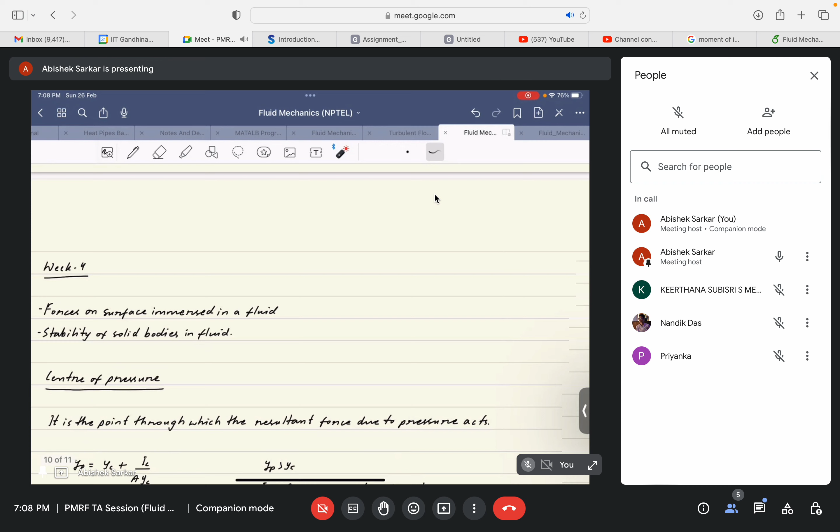So if a body, say a flat plate or any arbitrarily shaped body, is placed in a fluid, it will encounter some forces due to the pressure distribution along its surface. Since the pressure distribution is not uniform throughout the fluid, the center of pressure is not equivalent to the center of gravity of the body, right? So you can just refer to the following diagram.

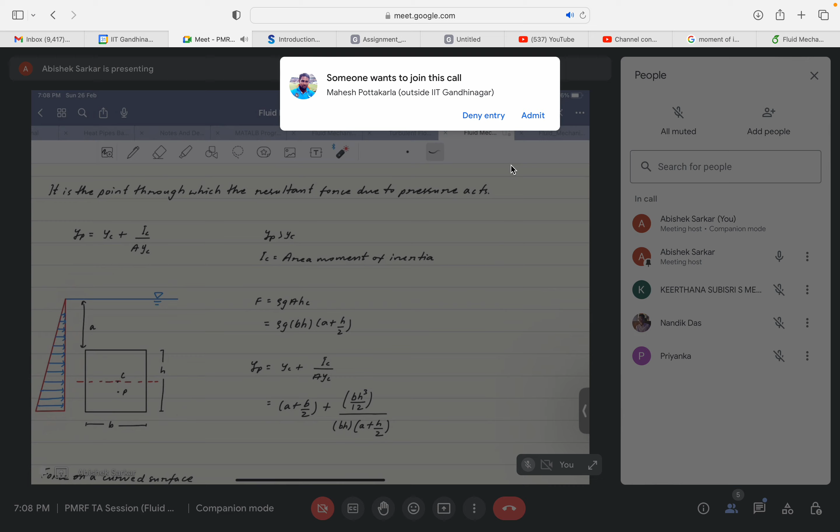So here you can clearly see that this force triangle basically represents the pressure distribution in the fluid, and this is not uniform. Why? Let me just wait. So why isn't it uniform? Could anyone please explain? Because of the height. Yeah, so thank you again.

If you remember the lectures of week 3 and the previous sessions, you can remember the equation dp/dz = -ρg, or if you just integrate it, you will find that it is -ρgz plus some constant, and you will eventually get to know that the constant is the initial pressure that we define on the surface.

So here you can clearly see that pressure is a function of z, and z basically means in this diagram the depth where the object is placed from the free surface. This triangle and these two lines represent the free surface, so it is the depth of the object from the free surface, and thus pressure varies with the depth. That's why there is this variation along the vertical height.

But say there was a scenario where the pressure distribution was uniform throughout the depth of the body. How do you feel about the position of the center of pressure now compared to the center of gravity of the object? Would it be the same, different, or if different, why so?

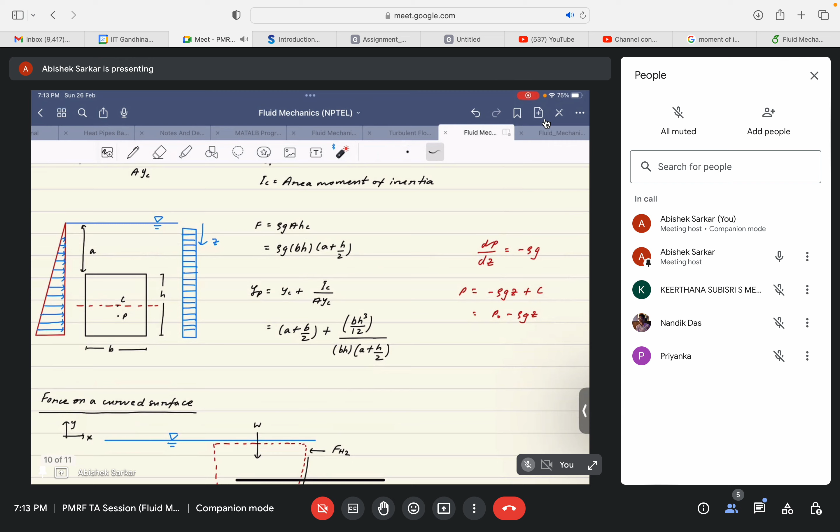So all these three quantities are bound to be positive, no matter how small the value of this fraction becomes, this quantity would be positive, and thus yp will always be at a greater depth compared to the center of gravity of the object. Okay, so I guess this is a very simple concept, but it's important for you to remember. So that's all. Okay, then we just recapitulate the forces on curved surfaces.

So I'll just explain a bit and then go through it as quick as possible. Imagine there is a curved surface placed in a fluid at a certain depth. So this is the curved surface. I've drawn it by this black line. And here you can clearly see the forces acting on this curved surface.

So there are various ways to evaluate it. I guess Professor Chakraborty also mentioned the integration: if you know the function of this curve, you can find out the forces by integration, by taking an elemental area. But from an engineering point of view, as engineers, we would like to take the simpler approach, the approach that is deemed to be much simpler and equivalently accurate. So here we take the concept of projections.

So here you can see that, if you recall it from the lectures, the horizontal force that acts on this curved surface is equal to the horizontal force that would act on the vertical projection of this curved surface. And as you can see here, if I just mark it, its vertical projection will be this area.

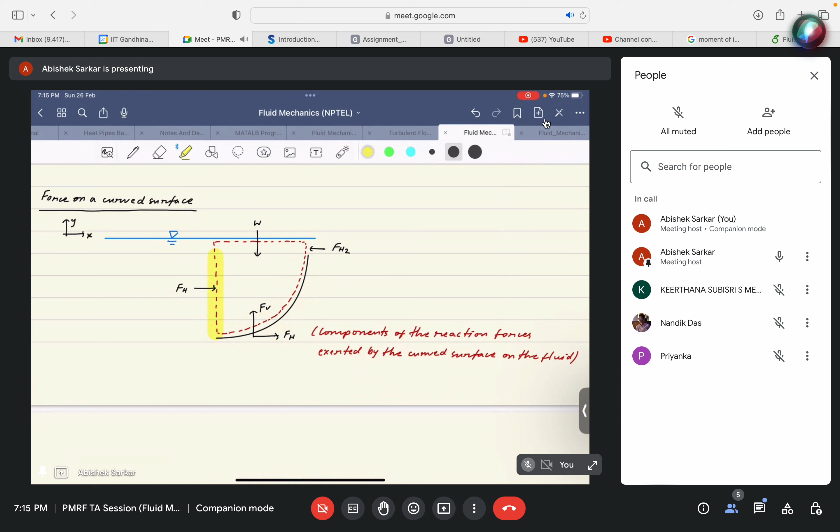And if you recall again, sorry, the horizontal force would be equal to the force that acts on the vertical projection of this curved surface area. And the net vertical force would be equal to the weight of the fluid, right? If I'm not wrong. So yeah, I guess again these are clear.

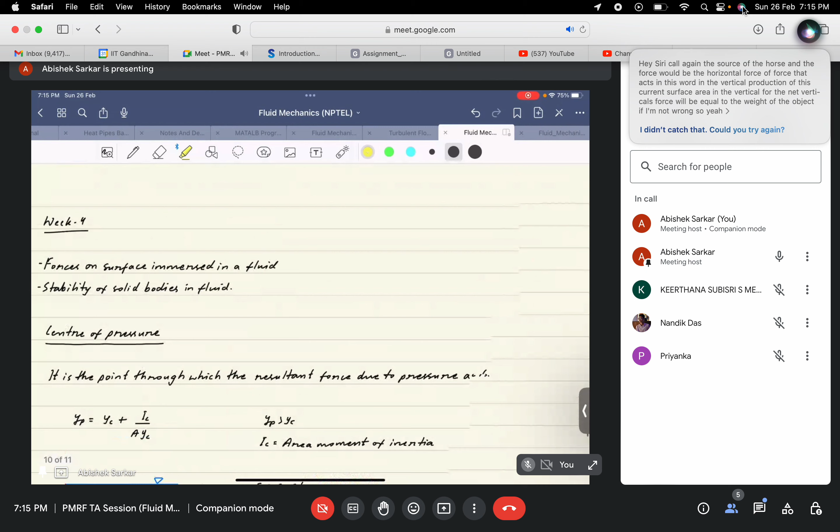So let's now directly go to... okay, so is there any doubt regarding these concepts, in this first concept at least, the forces acting on a surface immersed in a fluid? Is that clear? Nandik, Priyanka, Keerthana. Oh, yes, thank you, Nandik. Thank you again.

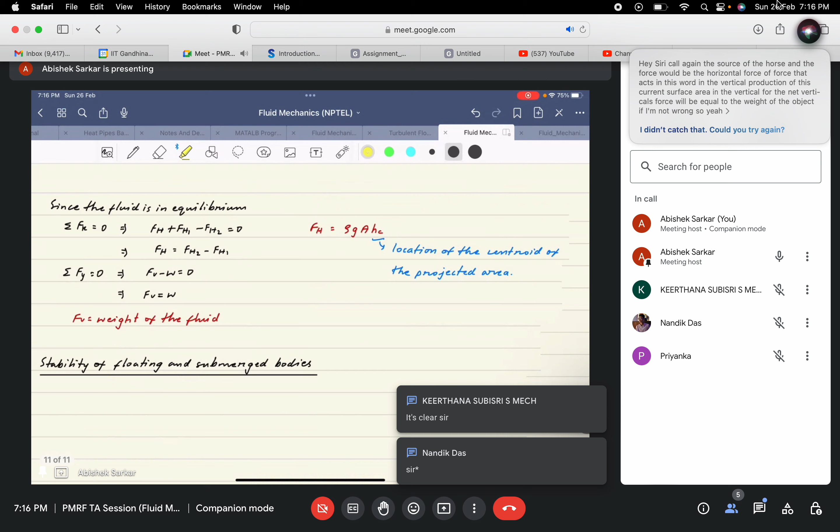Okay. So now we look into the stability of floating and submerged bodies. I just wanted to ask you the difference between floating and submerged bodies. Could any one of you please explain the difference between a floating and a submerged body?

Nandik, why don't you? Okay. Priyanka, yeah, you can go ahead, please. Yeah, sorry. Hello, sir. Or should I wait, sir? No, that's fine. You can go ahead. That only I told, no? You can go ahead, please.

Sir, in a submerged body, the object is entirely inside the water body. Whereas in floating, depending upon the object, some portion will be inside and some portion will be outside. Okay. Thank you again. Again, I'm curious to know what determines the height.

If you just think about it, you solved some problems, I guess. What determines the depth up to which the body is submerged in the case of floating bodies? What is the determining factor in those cases? If you could just recall.

Like, say there's a body A and there's a body B, and say body B is more submerged. Okay, Nandik, I can just complete the question. Body B is submerged to a greater depth compared to body A. So what insight do you get from this? What can you say about body A and body B if they're submerged in the same fluid?

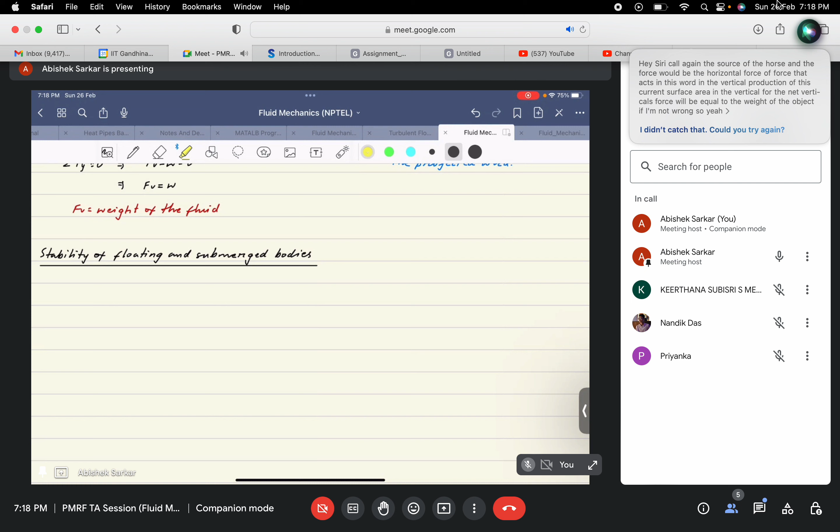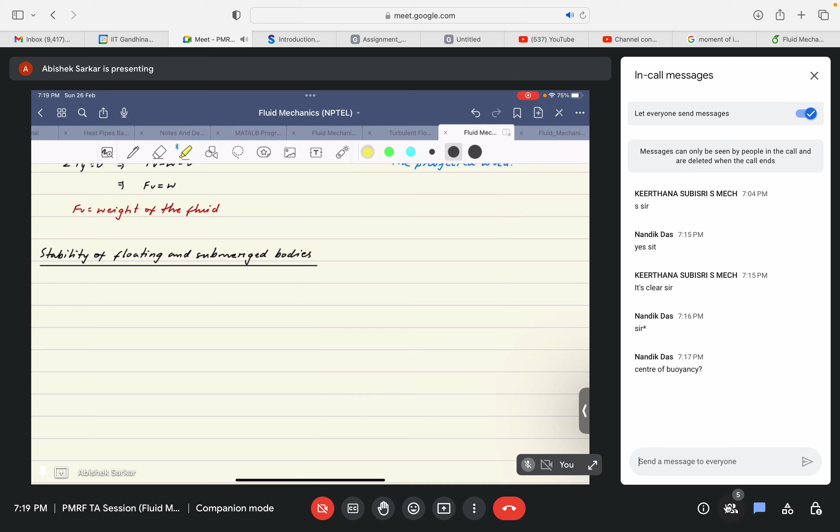Nandik, you mentioned, let me check again, the center of buoyancy. Do you have any doubt, or you wanted to say that this is what drives the depth of immersion in the case of floating bodies? I guess not directly. Center of buoyancy is actually dependent on the density of the body.

If the body is denser, it would get submerged within the fluid to a greater depth. Okay, and then the center of buoyancy would just be determined by the height of the submerged part divided by half. If it is a symmetrical body, as Priyanka correctly mentions, then it would just be half of the submerged part.

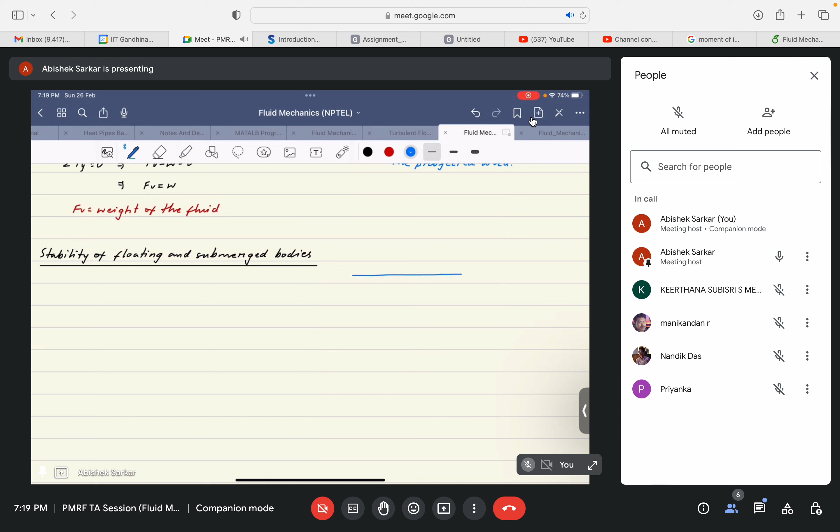I will just make it clear because maybe I am not able to explain it in a better way. Say this is a free surface of the liquid, and the body is submerged to this depth. This is the depth of immersion within the fluid. Then, as a conventional approach, the center of buoyancy is just given by h by 2, if I'm not wrong, right?

The center of gravity would obviously be, if the height of the body is h, then, sorry again, the center of gravity would be at h by 2, and the center of buoyancy is half of the submerged part. Yeah, it will be here. So this is the center of gravity, and this is CB. So is that clear, Nandik?

Okay, thank you. Since all of you have nicely clarified my doubt regarding floating and submerged bodies, let us first discuss completely submerged bodies, stability for completely submerged bodies.

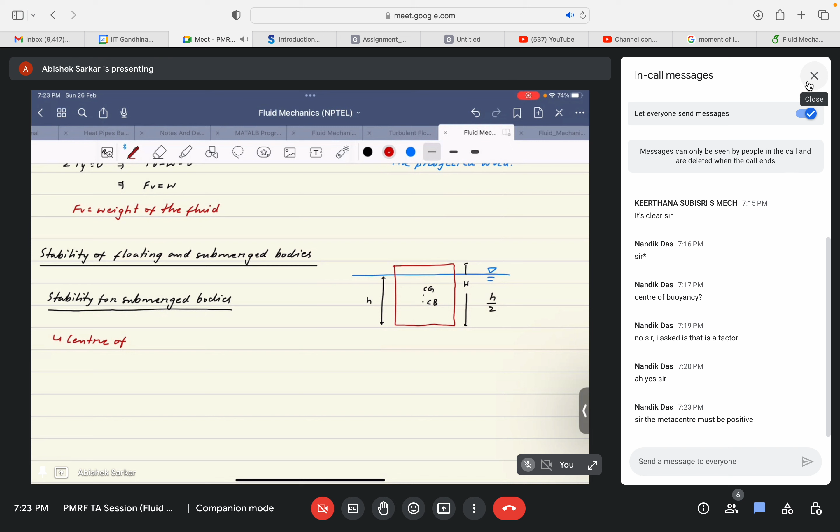Okay, you have written something. Let me see. Okay, metacenter. I guess you misinterpreted my question. You are relating the concept to some other case that I am going to discuss, but I am discussing submerged bodies. Submerged body basically means a body that is completely submerged within the fluid. So in that case, I don't think metacenter comes into the picture, but I guess you got it now.

Okay, so yeah, Priyanka, as she mentioned, she's absolutely correct. It is the center of buoyancy and the center of gravity that determines the stability of completely submerged bodies. Okay, so I would just like to draw one picture, and I would not repeat everything that has been discussed by Professor Chakraborty. I will just draw one picture and ask you about the locations of these points and how the locations of these points determine the stability. Okay, that would be better and I guess more efficient.

So I guess this was the exact diagram Professor Chakraborty has used. So okay, again see, it is completely submerged, so there is no point of meta center here. Say this is the center of buoyancy. Now I will use different colors so it is more clear. So this is the center of buoyancy. Say I give it the notation B, and this is the center of gravity. Again, sorry, this should be what? Wait, this is center of gravity. Okay, so I think I drew it correctly. So say I want two cases right now: stable and unstable.

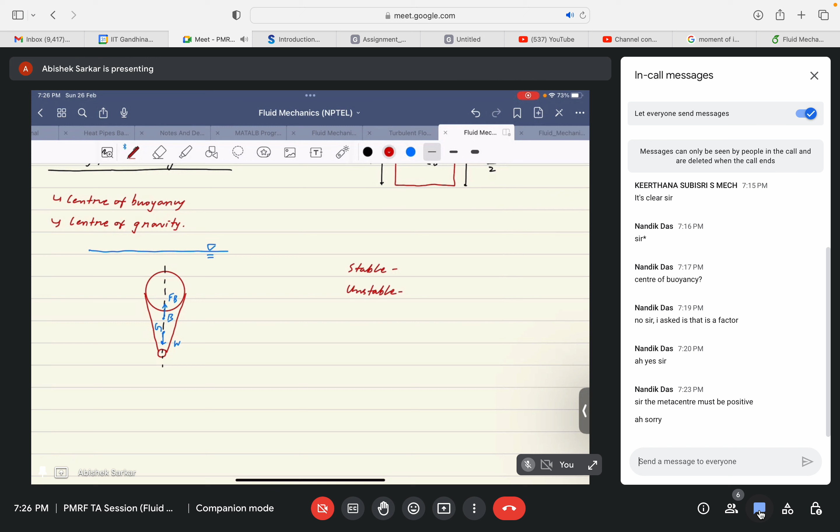I'll wait for some time. Okay, Keerthana, thank you so much for at least telling me that you didn't get it. I will just explain again, okay? So, Priyanka and Nandik, you are free to go if you have your answers. Could you tell the respective positions of the center of buoyancy and center of gravity for a stable equilibrium? Okay, Nandik, please go ahead. So, center of buoyancy will be more close to the open surface and center of gravity will be below that. Okay, thank you so much, you're absolutely correct.

So for the body to be in stable equilibrium, the center of buoyancy should be above G. Okay, so Keerthana, let me draw you a diagram to make you understand. Please let me know if I was successful in making you understand this concept. But also I again suggest you to revisit the lectures. That will be of your greatest help. But still, I will try to make you understand from my side. So let's just see. Okay. So again.

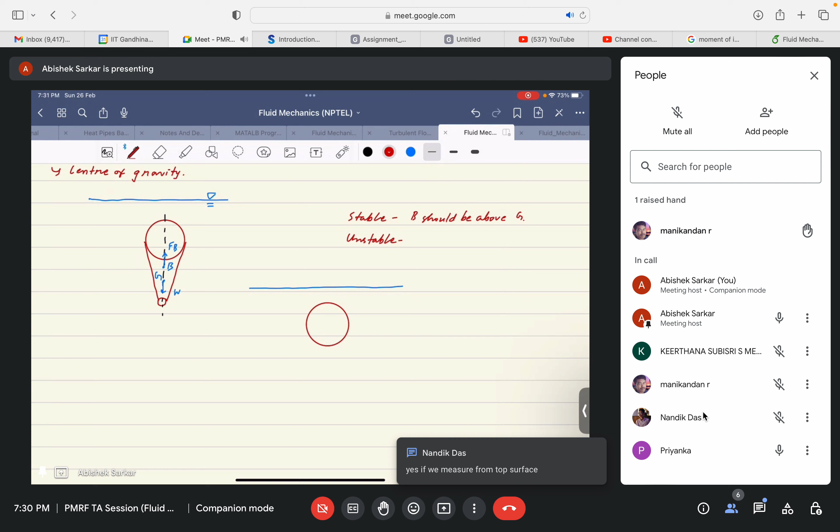No. Actually, it should be above G. So what Nandik mentioned is correct. But why do you think so? No, sir, I'm telling the distance. Like in the assignment, there was a similar question. Okay. Like for stable equilibrium, the height from the free surface, B should be above or below G, something like that.

Height from the free surface, I guess if the free surface is mentioned, it will be basically depth and not height, right? Yes, sir, sorry, sir. Depth, sir. So OB and OG, so OG should be greater than OB for stable equilibrium. Yeah, that's understandable, right? No, sir, but in the assignment solution, it was given opposite, sir. For stable, and for unstable.

It was also wrong. Okay, so I guess then you shouldn't follow the given solutions. Think logically. If you logically think that your answer supports your queries, then I don't think you should go ahead with the assignment solution. Then you can write a mail to NPTEL regarding it. Okay, I'm just trying to clarify what you are trying to say. Let me just draw it so that everyone can understand.

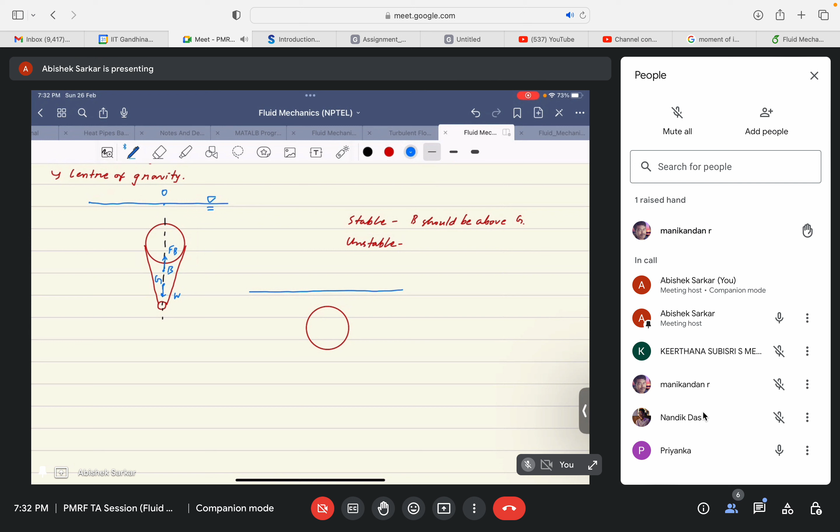So you're saying there is O here, right? This is O, right? You can unmute yourself. Just discuss with me. Yes, sir. In the question, it was mentioned that B denotes the distance of the center of buoyancy from free surface, and G denotes the distance of center of gravity from free surface. So, which among the following conditions ensure stable equilibrium? And another question was for unstable equilibrium.

So this should be stable according to your question, and this should be unstable. Yeah, I guess this should be the correct answer. Or is it just the opposite? In the assignment solution, they have given opposite, sir. Opposite of what you mentioned. Okay. Let me go through it. Maybe I will ask the other TAs also regarding it. You can also attend the other TA sessions so that they can clarify.

But if I'm understanding the question in the correct way, what they have asked, this should be correct. If you're measuring from free surface, this should be correct. But I don't know what they have written. I will discuss with them. We mentioned it in the discussion forum also, sir. Okay. I guess they will get back to you. I may also see.

That's fine. No problem. Don't worry. Okay, sir. Thank you. Your concepts will be clear. Maybe some answers are wrong sometimes. Your concepts will be clear. That's all. Okay, sir.

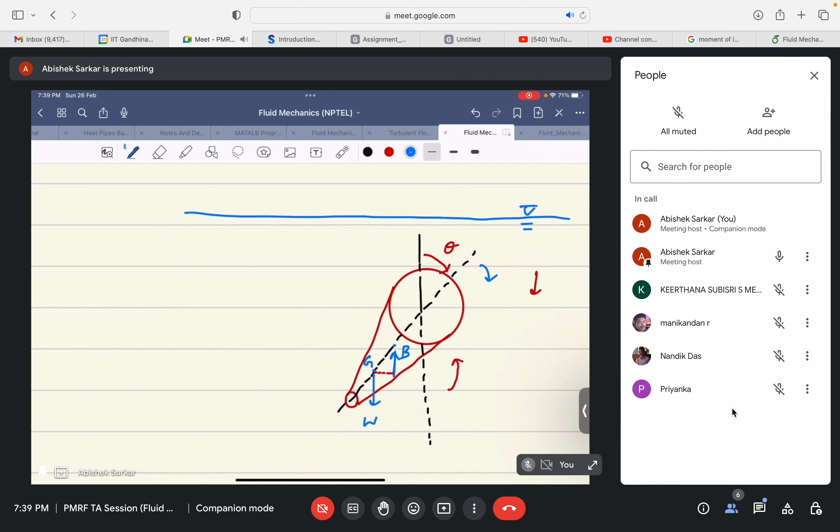So you can see that initially we have applied an angular displacement in a clockwise direction that has caused the body to have an angular displacement of theta degrees. This was our initial direction of angular displacement. Because of the position of the center of buoyancy and center of gravity, there is a restoring couple in the opposite direction, the counterclockwise direction. As Nandik has correctly mentioned, this is the restoring couple

that causes the body to get back to its original position. Given that the initial displacement was very small, or up to a certain limit, this restoring couple acts on the body in a counterclockwise direction to make the body reach its initial position. And that's why the body is said to be stable for this case. Is that clear, Keerthana? Okay, thank you. So I guess now it's clear.

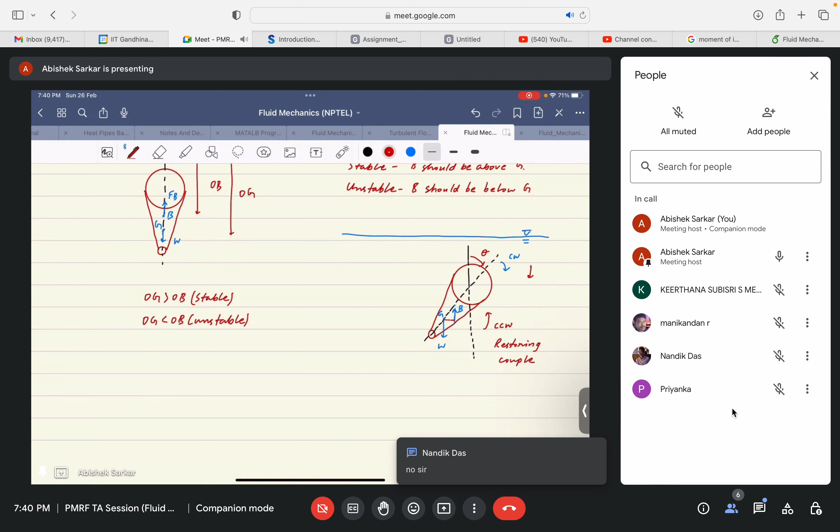So unstable will be just the opposite. B should be below G. Okay, I guess that's clear. So do you have any doubt regarding the stability of submerged bodies? Okay, I guess it is clear. So let's now discuss briefly floating bodies, stability of floating bodies.

So again, like the previous case, what are the parameters that determine the stability of floating bodies? Previously it was submerged bodies. So now what determines stability of floating bodies? Metacentric height. Yeah, that's absolutely correct. You have rightly mentioned it is the metacenter or metacentric height.

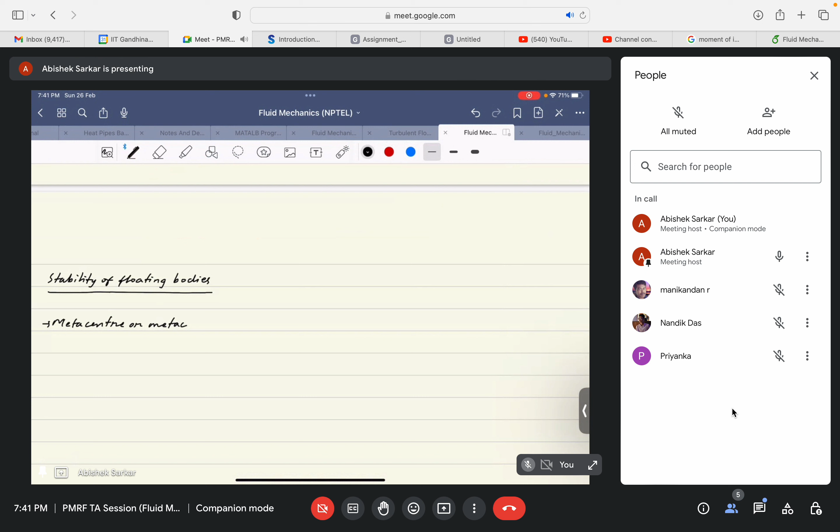Could any one of you briefly explain what you mean by metacenter or metacentric height? Metacentric height is the distance between the center of gravity and the metacenter. Okay, then what is metacenter? If we draw a perpendicular line through the center of buoyancy, the point of intersection is called the metacenter. Intersection with what? Intersection with the axis through the center of gravity.

Okay, thank you. I cannot find any fault in your definition, it's absolutely correct. So I would like to again draw a picture so it is clear for everybody. Say this is the free surface of the liquid, and initially the body is placed like this. I should draw both diagrams so it is clearer. So this is the free surface, and the body is initially placed like this.

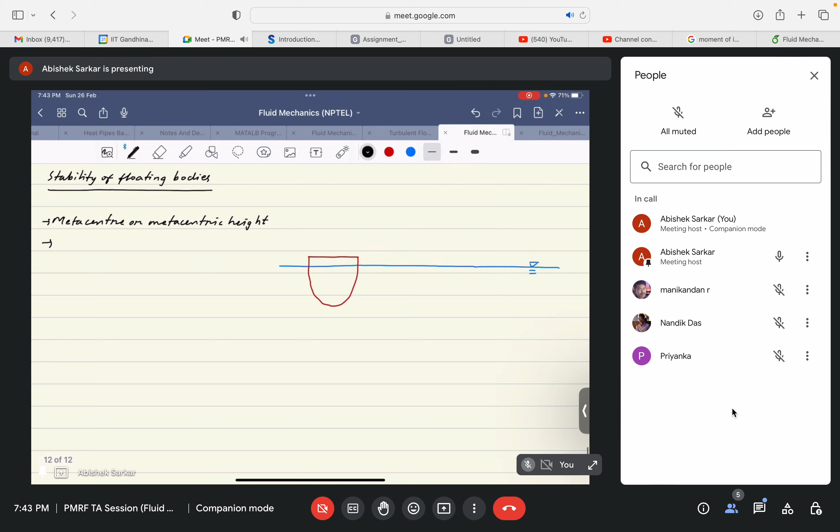This is the central axis of the body. Say we give names to the points along the free surface of the liquid, where the body meets the free surface of the fluid, for a clearer understanding. Say this is A and B, and this is the initial shape of the body, and we give a slight displacement again like the previous case, in the clockwise direction.

We give a slight force at point B, say it is B double dash. At point B double dash we give a slight force which causes the body to have a slight tilt, a slight angular displacement in the clockwise direction. Then the body would assume this position. So let me draw the central axis again.

So, like this. Okay, this would be A dash and B dash. Say the positions have changed. So here we say G denotes the center of gravity of the body. Okay, and in this case, for this given body,

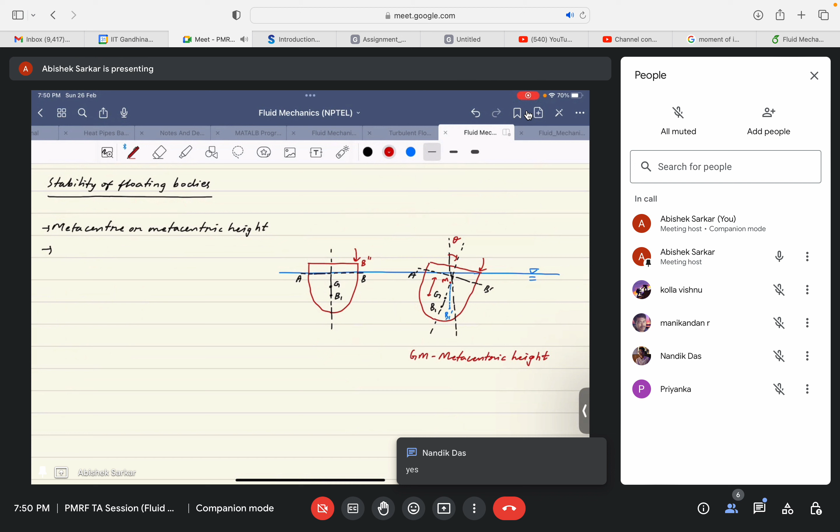Okay, so now we know the concept of metacenter and how it is determined, and most of you would have done such experiments in your fluid mechanics lab. So, like the previous case, could anyone of you tell me the condition for stable and unstable equilibrium for floating bodies, given that the metacenter, or metacentric height, is the determining parameter? Yeah, Manikandan, please go ahead.

Sir, when the immersed body is tilted, we can find the metacentric point. But while it is not tilted, can we find the metacentric point?

Okay, so yeah, that's a very good question. Let me think about it. See, metacentric height is basically a way to denote the direction of the buoyant force that acts along the central axis of the body. Okay, to know the point at which the buoyant force acts along the central axis of the body.

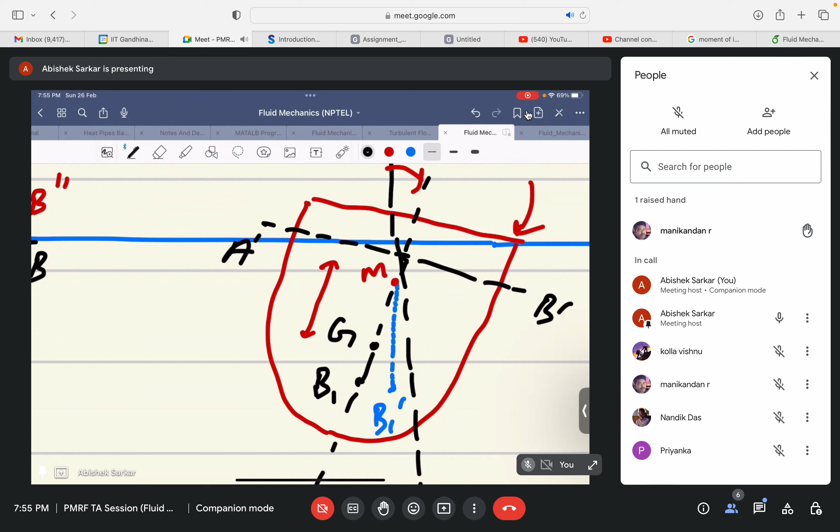Similar to the previous case of completely submerged bodies, here we can clearly see that at M, the metacenter, is the point where the buoyant force acts. So this would have a component of the buoyant force along this direction. It is too messy, so I would again just draw slightly outside.

So say this is the central axis of the body. This was the initial center of buoyant force. This is the center of gravity, and this is the metacenter. And since we know it is along the metacenter the new buoyant force acts, the buoyant force will have components along this direction, and the gravity would act in the vertically downward direction. So this is weight and this is FB.

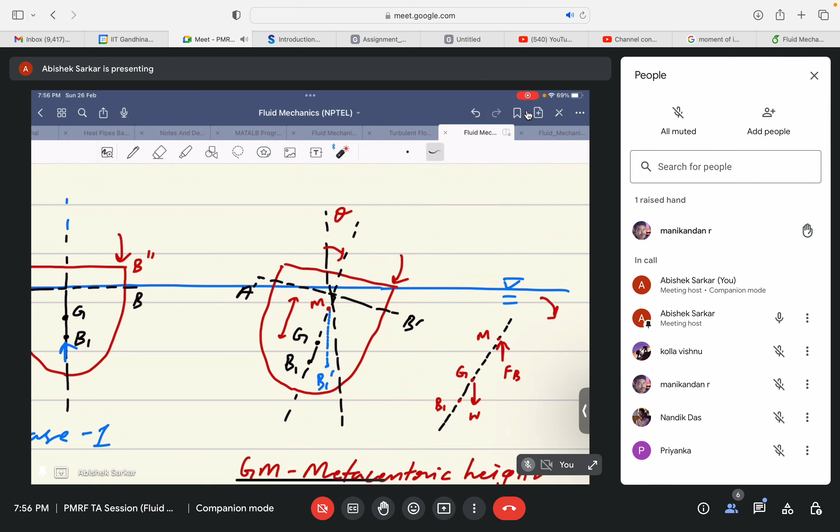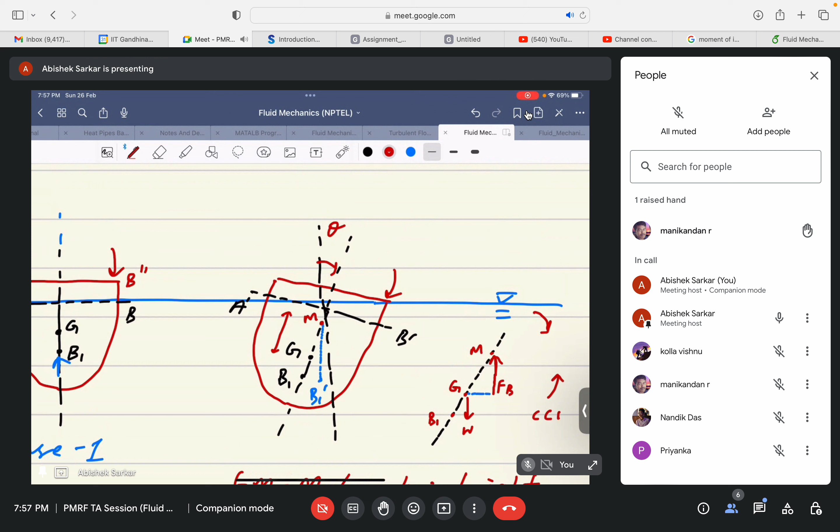And since our initial displacement was in the clockwise direction, as it is mentioned here, you can see that if we have a horizontal distance between these two points and extend these two forces, there is a restoring couple, or I cannot say that right now. You can see the orientation of this couple is in the counterclockwise direction, and this is clockwise direction.

And since this is against the initial disturbance that we have given to the body, this restores the displacement or the tilt of the body to its initial position, thus making the body stable, a case of stable equilibrium.

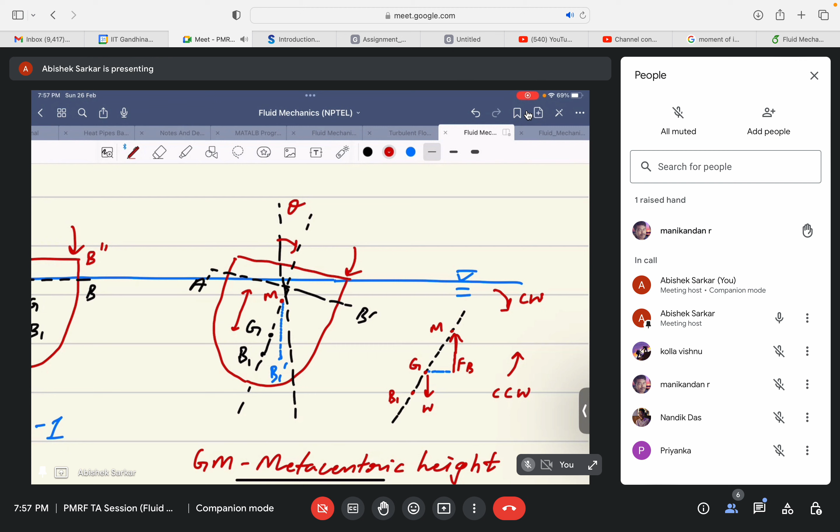And similarly the vice versa, if M is below G, I can draw here itself. This is the initial center of buoyancy, say this is the center of gravity, and say this is the metacenter. And again we have given the same initial displacement here.

If this is the case, you can see that gravity now acts along this direction, the buoyant force acts along this direction, and again if we draw a perpendicular line between these two forces, you can see this couple now acts in the clockwise direction.

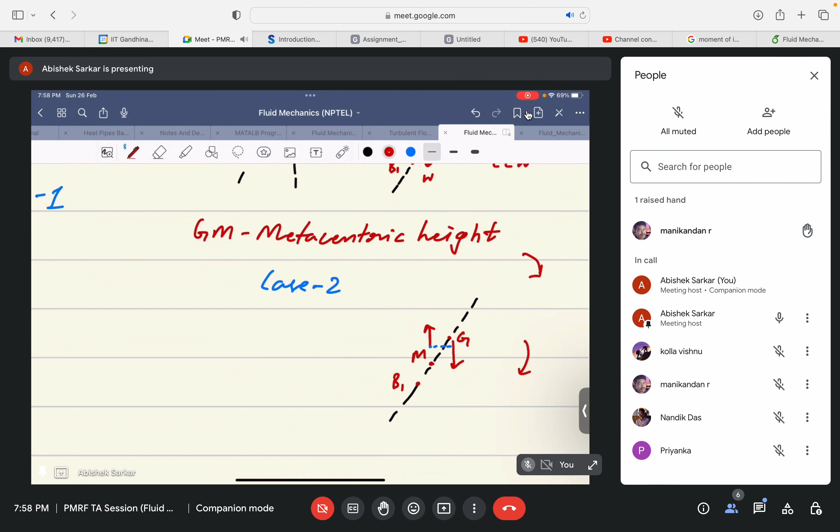And since the initial displacement was in the clockwise direction itself, and this couple, due to the respective positions of the metacenter and the center of gravity, is again in the clockwise direction, we can observe that this couple would cause the body to tilt more, have a higher angular displacement, because of this additional couple acting due to the respective positions of M and G.

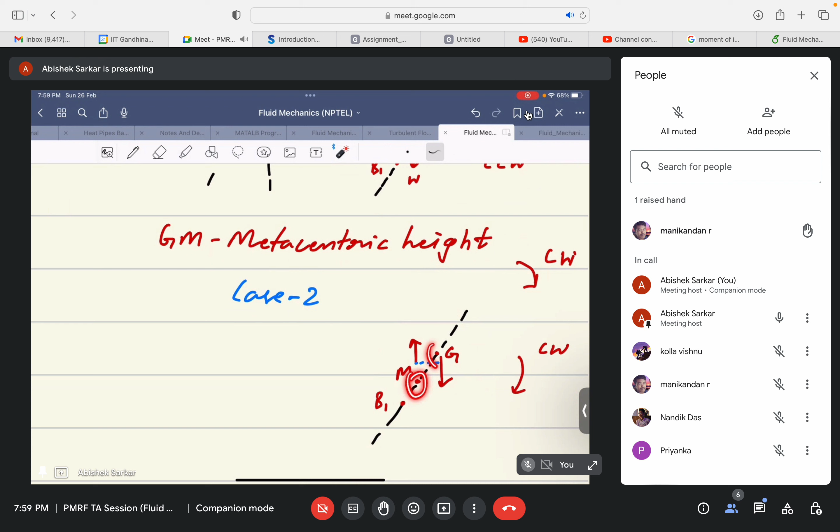And thus the body will move further away from its initial equilibrium position, and thus the name unstable equilibrium, and we can say the body is unstable. So I guess it is clear. Is the stability criteria for floating bodies and submerged bodies clear?

Yes, sir. Thank you, yes, sir. Manikandan. Yeah, I can understand.

And is it right? In case one, the body will move to a stable condition, right? Yeah. And there, M is above G. It means stable, right? Yes. But in the unstable condition, it will move down. Yes, sir. Because of this rotation. See, there is an additional couple that makes the body rotate further away from its initial position. That's why. Okay, sir.

But these cases are not possible in the condition of submerged bodies. Right, not possible, because there the center of buoyancy remains the same. Okay, sir. Here the center of buoyancy changes because the volume of fluid that is being displaced by the body changes. That's why center of buoyancy changes.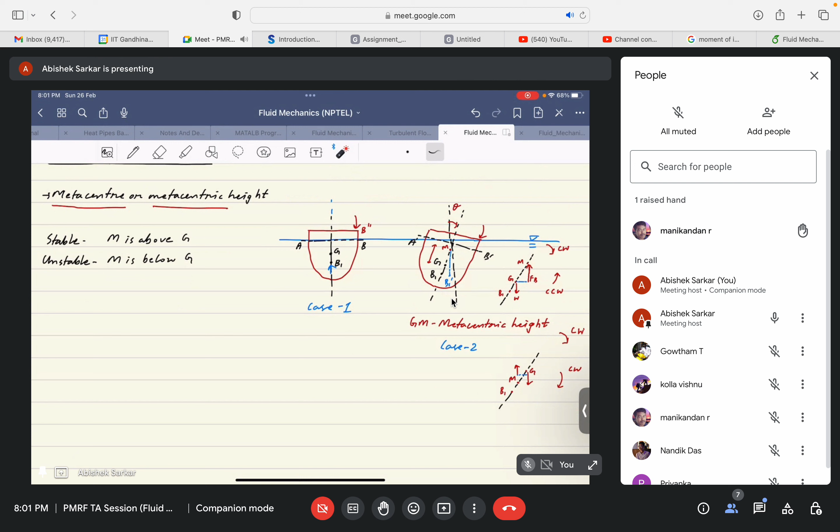Just for your knowledge, I would like to say something more regarding this stable and unstable equilibrium. If any one of you in your future try to study advanced fluid mechanics, like if you're doing your masters or PhD, you might encounter a subject named advanced fluid mechanics. In there you may encounter some other chapters regarding stability, hydrodynamic stability. In that case also the concept of stable and unstable remains the same.

It's a very fundamental concept, not only applied in the case of floating bodies but also at the fundamental flow level, how the flow becomes stable or unstable. You may know the concept of laminar and turbulent flows, right? And you also know that the flow transitions from laminar to turbulent. How does the transition occur? That's a very important concept, and this transition is driven by the concept of stability.

If for given conditions the flow becomes continuously unstable, the flow would transition from laminar to turbulent. But for the same flow, if for a given flow condition the flow is stable, even if we apply some perturbations to the flow field, if the flow has a stable equilibrium, then the flow wouldn't transition to turbulent flow. So this is the basic understanding of stability and instability, just for knowledge.

So if the body, stable and unstable. So for an initial perturbation. Does anyone of you know what perturbation means? Okay, that's fine. Right now you can just take it as a small disturbance. That would be a very good synonym for this word, and you get to know more about this when you read about turbulent flow fields. So a small disturbance is given.

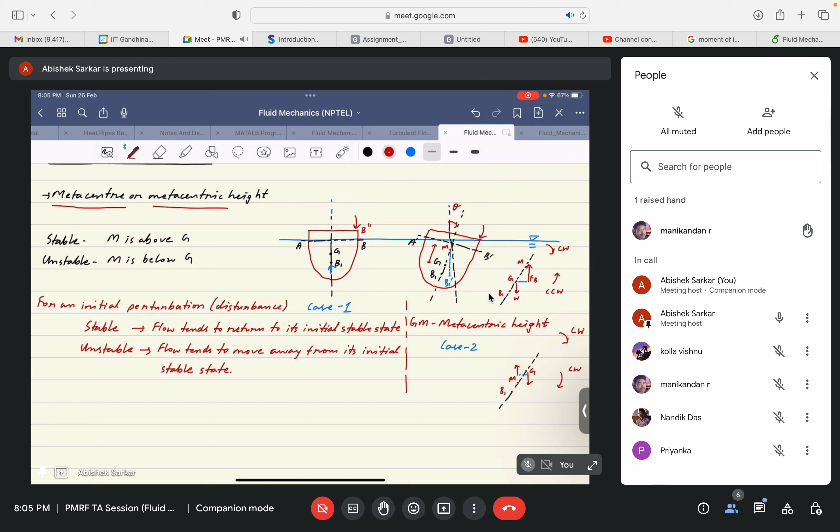You'll get to know more about this later, not in this course, but if you take an advanced fluid mechanics course in the later part of your studies. So that's really about it. I guess this was all I wanted to discuss in this class. So we can directly go to the questions and answers. We can discuss some questions to get a clear understanding of these concepts.

So please go through this first question. I guess this will be very helpful to understand the concepts. Just go through the question and try to tell me the approach that we have used to solve this question. Okay, I'll wait for some time.

Oh, I'm sorry again. Yeah. Please.

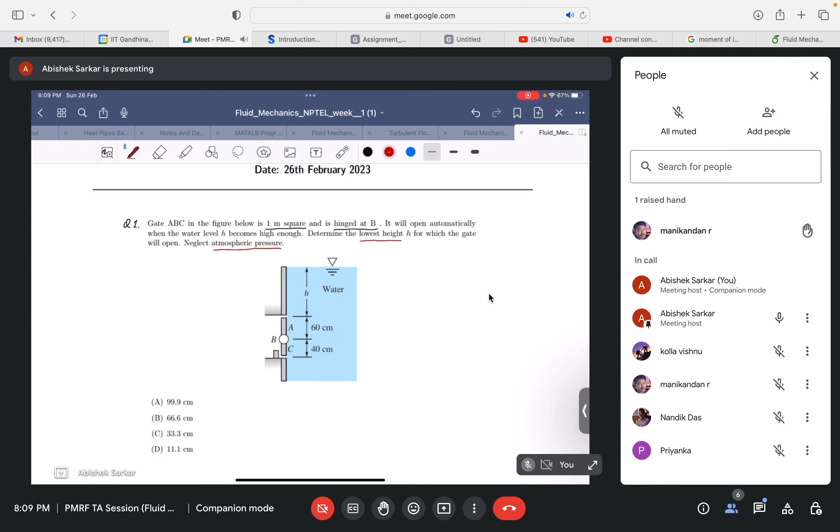So first of all, I'm not questioning your understanding level, but did you understand the question clearly? Did you understand the gist of the question? Yes or no would do. If no, I would explain. If yes, then I would ask you to explain to me what you understood. So yeah, please. Priyanka, Nandik, Manikandan, Vishnu. You understood the question? Okay, Priyanka, please unmute yourself and tell us what you mean by the question, and then how you would approach it.

Based on the height of the water, there will be some force acting on the gate. Okay. Let me follow with you. You say based on the height of the water, there will be some force on this gate. Yeah. Then? That force will cause a moment about the hinged point. Okay. So where do you think the forces will act? For the gate to rotate, it should act on AB. Okay.

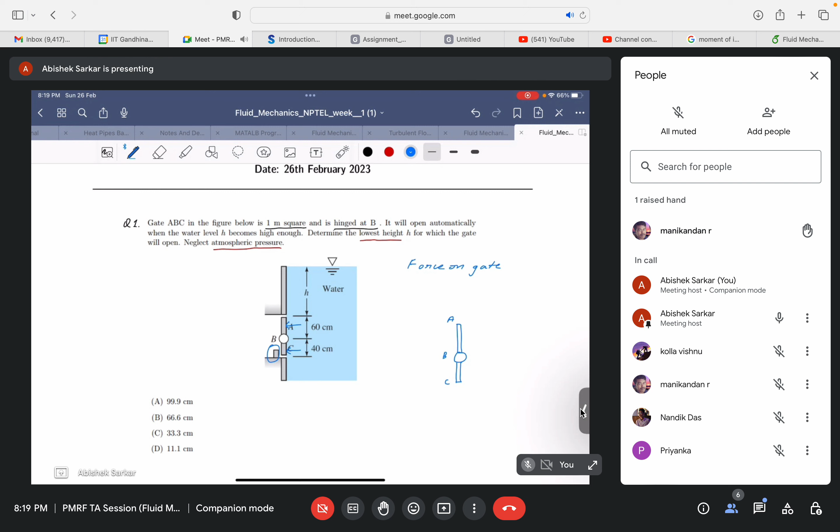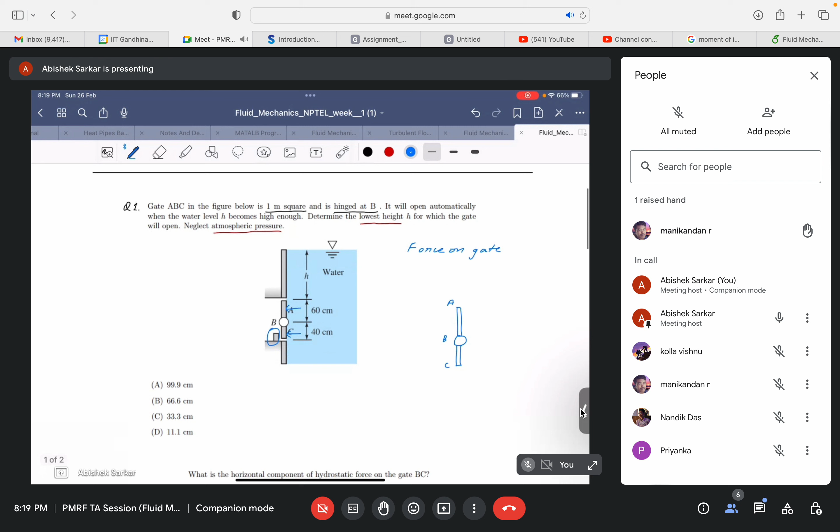Okay, so let's approach it in a similar way like what Priyanka said, but with a slightly different parameter that I will try to find. Sorry, yeah, I would work upon a similar concept but a slightly different parameter to get the answer. Okay, so I guess for this class I'll solve only this question, because this is the one that is a bit difficult and quite interesting. So yeah, I'll just discuss this question for today's class.

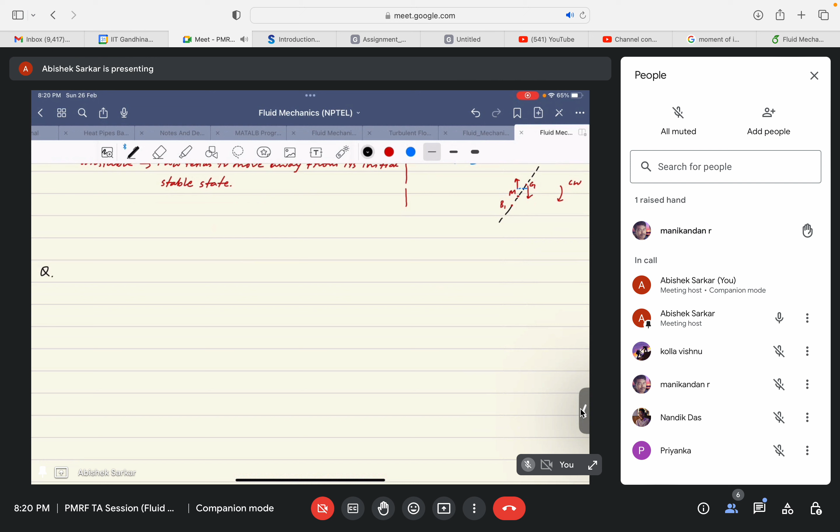Okay, let me draw a diagram again. Okay, bear with me, it will take some time, but yes, good things take time, so you can wait for a while.

Meanwhile, are any of you very clear with the concept of inequalities? Like, say there is an equation. Oh yes, thank you, Nandik. Then I will need your help. I am a bit doubtful regarding my concept, so I will need your help. Okay, Nandik, thank you. Help me out. Okay. Thank you.

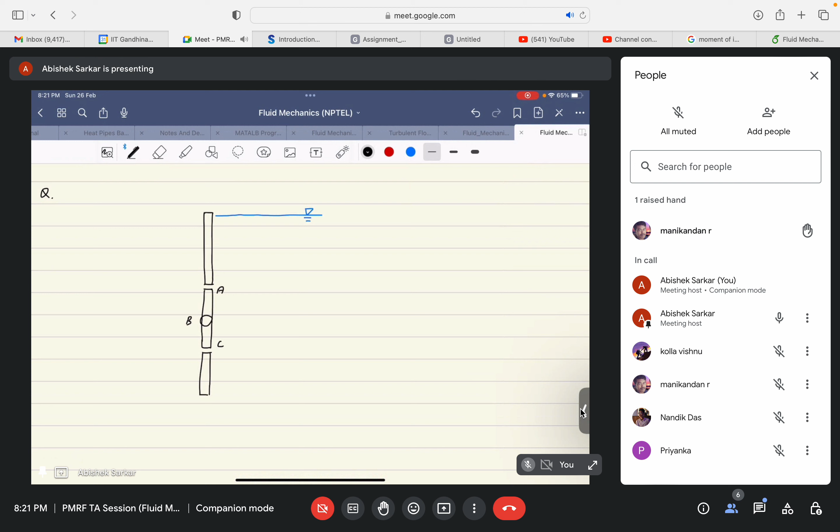So this is B, this is A, this is C, there is again a stop here, and this is 60 centimeters, this is 40 centimeters, this is H. Okay, yeah.

So as Priyanka mentioned while explaining her approach, the force should act at AB. And here she is absolutely correct, because if the force acts at BC, the gate will try to rotate in the clockwise direction, which would not be possible because there is a block here that will stop the gate from rotating. So it's not desirable, since the gate won't open and we will not be able to release the extra water that we want to release.

Say to mitigate the extra water or the flooding scenario uphill of the dam. Say this is the case, just an example, okay? This is not desirable. What we want is that the force would act along AB so that there is a counterclockwise rotation that will open the gate and release the additional water, okay?

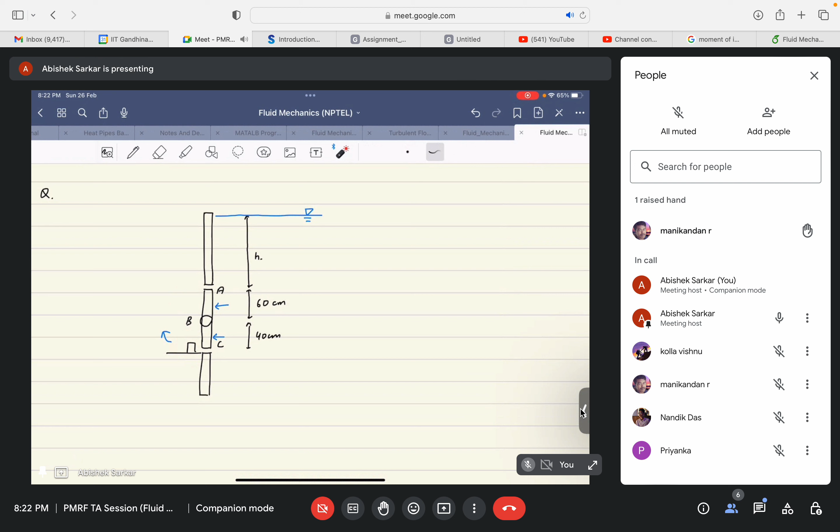But here, if we go about through forces, see, there are two forces that we need to encounter to determine the couple, right? And then it becomes difficult because it is the same fluid and the same plate, that's the catch, the same plate that is hinged at B. So the two forces make the problem quite complicated. But we know the concept of center of pressure, right? It is that point along which the resultant force of pressure due to the fluid column acts in a submerged body.

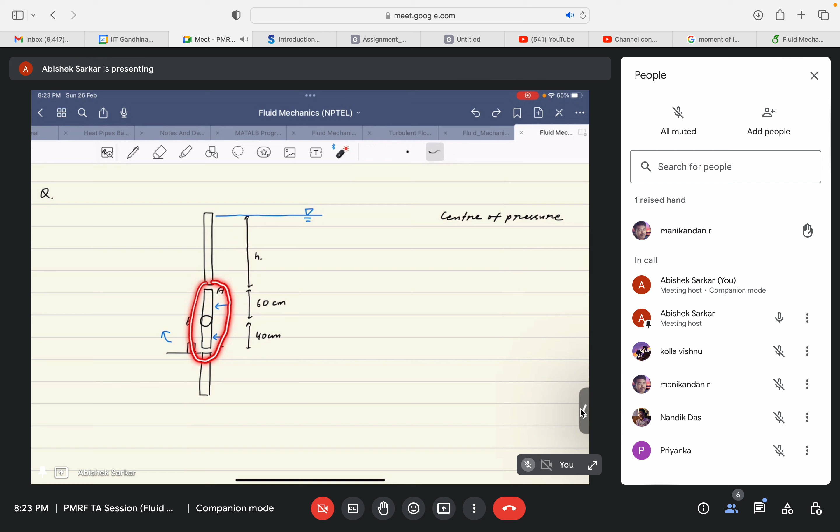So considering that this plate, which has the ability to rotate and is hinged, is a submerged body in this fluid with height h, we can assume that the force, say FAB, should act at this point, say YAB, where YAB is the center of pressure. Since this is the center of pressure, the force FAB would act at the point YAB. But we need to know what height would cause the force FAB on this plate to be at YAB instead of being anywhere at BC, say YBC.

Are you getting it? We don't want the center of pressure to be anywhere in the range BC. We want our center of pressure to be anywhere from A to B. Is that clear? Please let me know, yes or no. It is a very important concept. Yes, Priyanka, are you clear? Yes, thank you. Manikandan? Sir, can you repeat, sir? Yeah, sure, no problem. That's why I asked.

See, you know the concept of center of pressure, right? It is the point through which the pressure force due to the column of fluid acts in a submerged body. So if the center of pressure lies anywhere along BC, thank you, Manikandan, say it is at this point, this would have a tendency to rotate the plate in the clockwise direction, which we don't want, because even if it rotates, it won't open because of this block. It will get stuck here and the gate will remain closed.

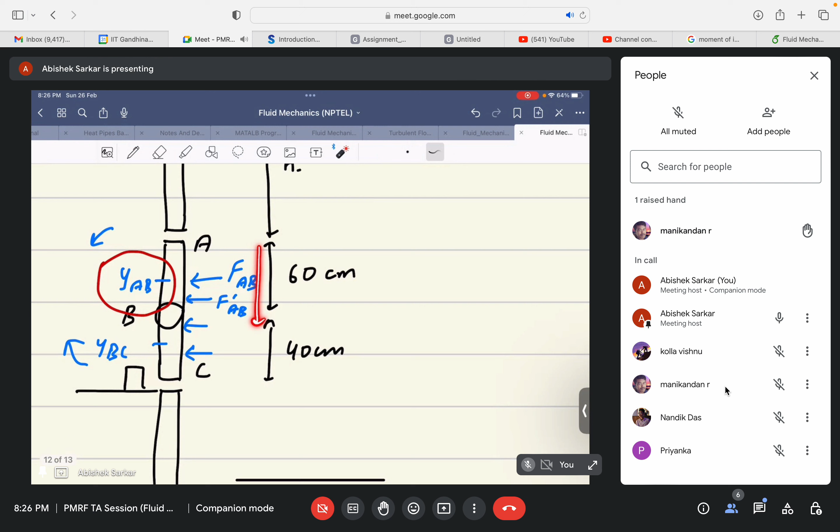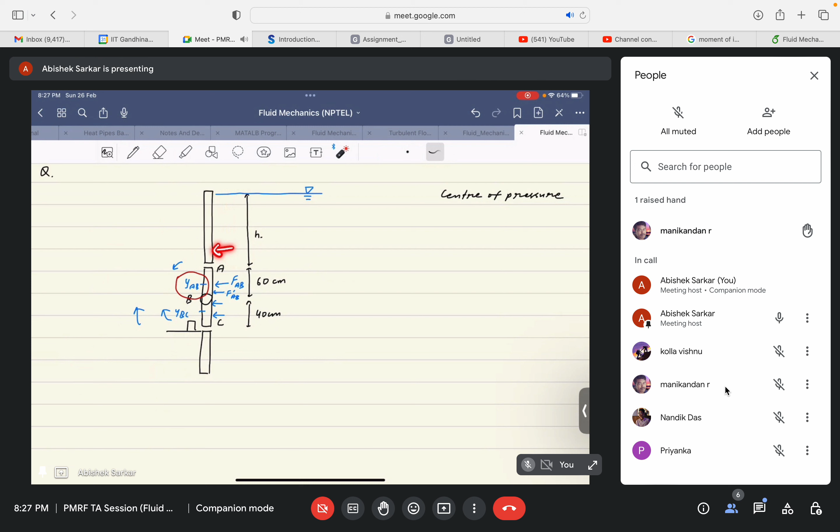Okay, because if it is anywhere here, then the resultant force will act along here, then it doesn't operate the gate at all. So we want it to be in the range of AB, right? So keeping that concept in mind, if you recall the formula for center of pressure YP, it was equal to YC plus IC by AYC, if I'm not wrong. If I'm wrong, just please correct me.

Then what would be the YC for this plate, the plate AC? Could any one of you please tell what will be the center of gravity for the plate AC in terms of H and the given dimensions? Priyanka, Manikandan, anyone. Priyanka, go ahead. So H plus 0.5. H plus 0.5, yeah, because the gate's height is 1 meter, right? So it is 0.5. Yeah, you are right.

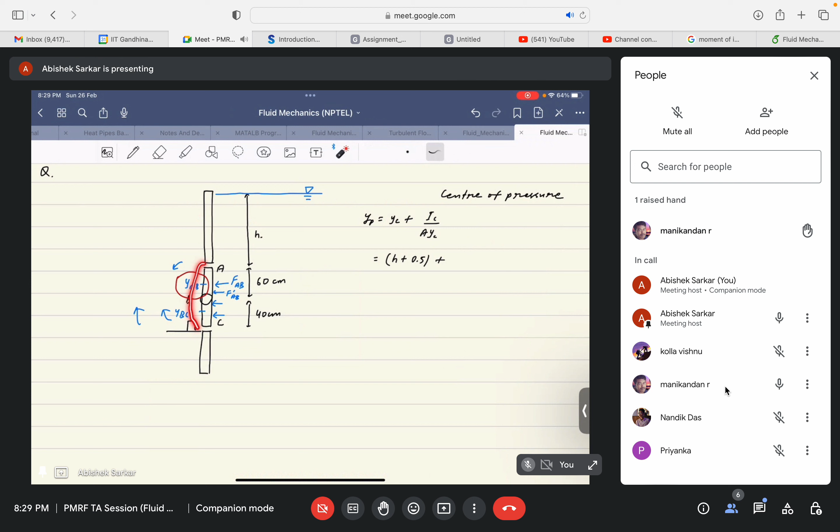Thank you. Manikandan, since you have raised your hand, you can help me tell what would be IC, the area moment of inertia for the plate. Breadth into height cube is IC. Okay. But here breadth is 1 meter. Yes, 1 meter square. Height will be 0.5 meter. No, it is for the entire plate. I am telling about the entire plate. Okay, one for this one.

Yeah, that is one basically, you can write like that, it doesn't matter. But just for your ease of understanding, it is divided by 12. BH cube by 12. If this is B, this is H, and you want to find the area moment of inertia along xx, your Ixx is BH cube by 12. If I'm wrong, please let me know. Yeah, we know, sir.

So since in this case B and H are equal, it will become 1 to the power 4 by 12. And A would be 1 square, multiplied by YC, which is 0.5 plus H. And now what we want is that this center of pressure, plus 1 by 12 by 0.5 plus H, should be less than, if we measure from the free surface, what should it be less than? Any one of you, please. H.

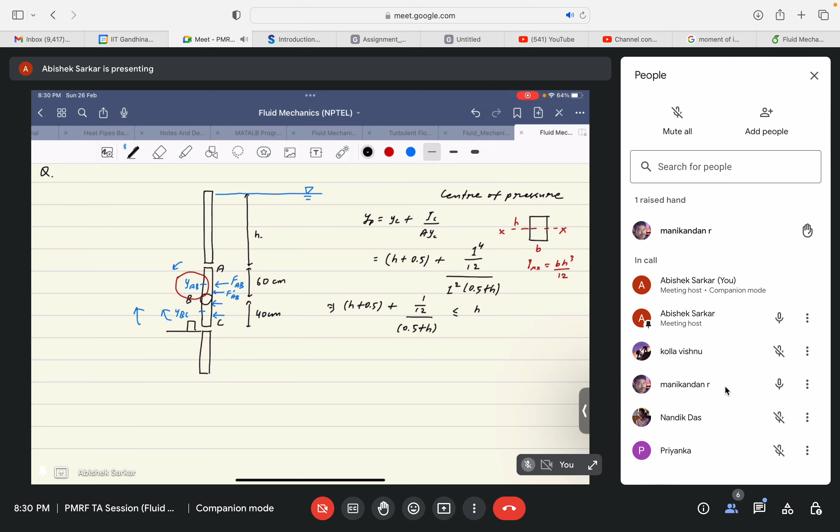Okay. Anyone have another opinion? It is H only. Nandik, what do you think? Sir, actually I think it should be greater than H. Okay, please ignore the inequality because I'm very poor in it, so forgive me for the signs. But regarding the right hand side, what should it be? Is it H or something else, measuring from the free surface? Nandik, do you agree with H or should it be something else? 1 minute. Okay, no problem.

Oh, sorry. Okay, I guess we are short of time. Okay, no problem, that's fine. But help me out with inequality. You said you will help me out with inequality signs, so I need your help.

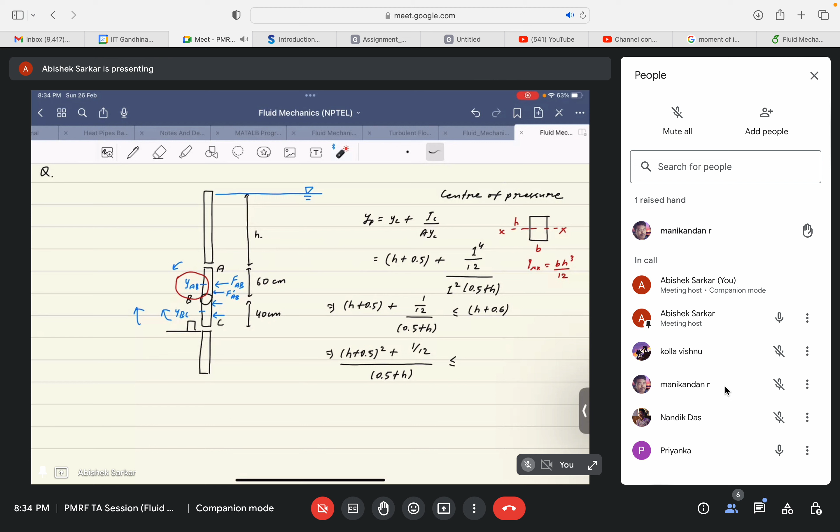But I am trying to find the center of pressure, because I want the center of pressure to be anywhere between A and B. So there is no point choosing my deciding height here. I want my center of pressure to be slightly lower than H plus 0.6. That's why I'm choosing H plus 0.6, and that's why this inequality sign.

Okay, sir. Okay, sir. Thank you, sir.

Measured from the free surface, I want my center of pressure to be slightly below H plus 0.6. And here also, no matter what your approach is, the unknown parameter here is H. Eventually, we will get an equation in terms of H, and we will have to find the value of H. That's all. No matter what parameters you choose on your right and left hand side, it doesn't affect it at all. So, is that clear?

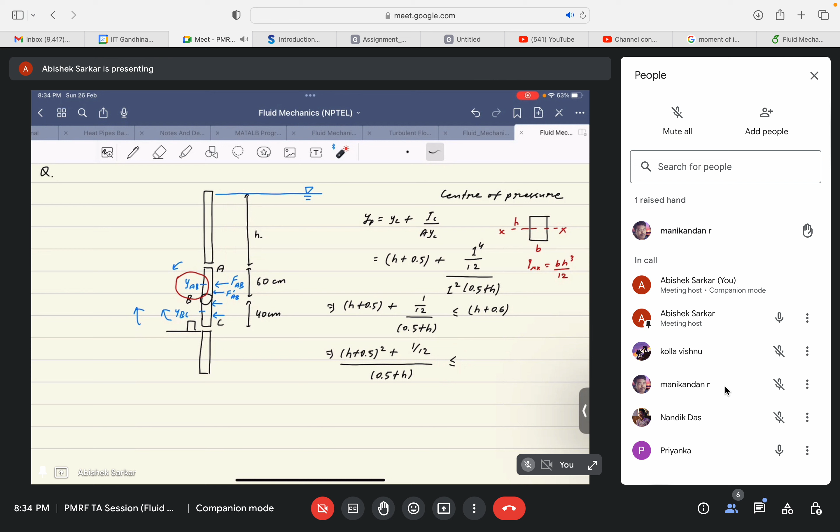Yes, sir. Thank you, sir. Yeah, sure, no problem.

So this is H plus 0.6. Okay. So the left hand side I initially resolved. Meanwhile, Nandik was trying to solve the problem. So it would be H square plus 2 into 0.5. So it will be H, I guess, plus 0.25 plus 1 by 12. If it goes there, then it will become H plus 0.6, H plus 0.5.

Okay, then this becomes H square plus H plus 0.25 plus 1 by 12 is less than or equal to H square plus 1.1 H plus 0.3, if I am not wrong. So I can cut out the H squares, then it will be 0.25 plus 1 by 12 minus 0.3 less than or equal to 1.1 minus 1 H.

So this turns out to be around, let me do it, minus 0.3 plus 1 by 12. So it turns out to be 0.0333 like that, less than 0.1 H. Yeah, so Nandik, now I need your help here. Would the inequality sign change if I take 0.1 here? Any one of you? I don't know, that's why I'm asking, I was curious, that's all.

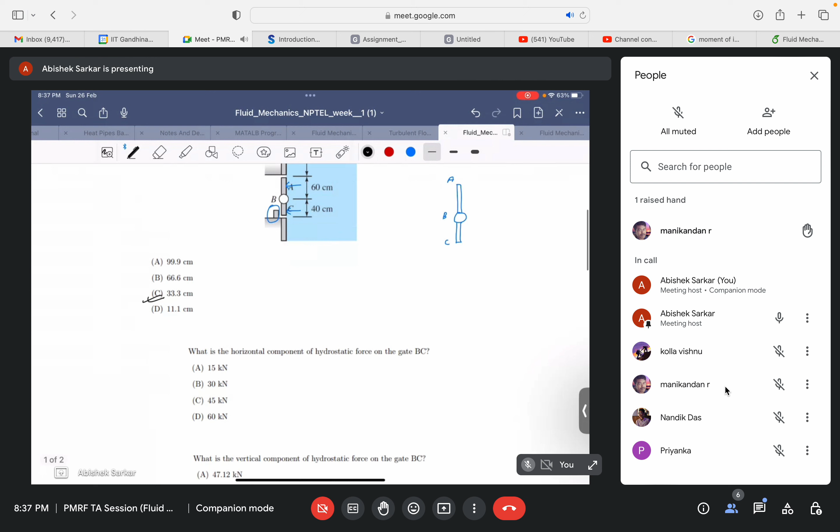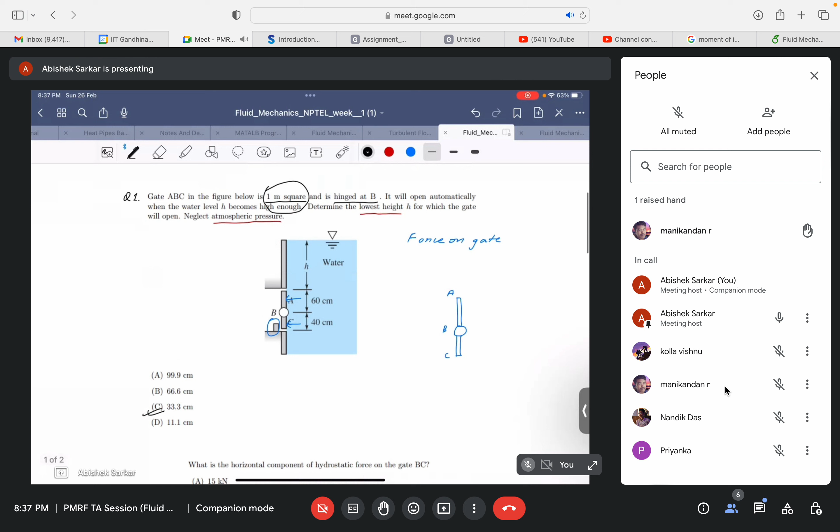So, okay, have I missed a question? Okay, I'm sorry. I guess I missed the diagram for this question. So just let me check it. I guess I missed the diagram for the question. Okay, so I will draw the diagram. I'm really sorry, I missed the diagram for question number 2 while making the question. So consider the following diagram, okay?

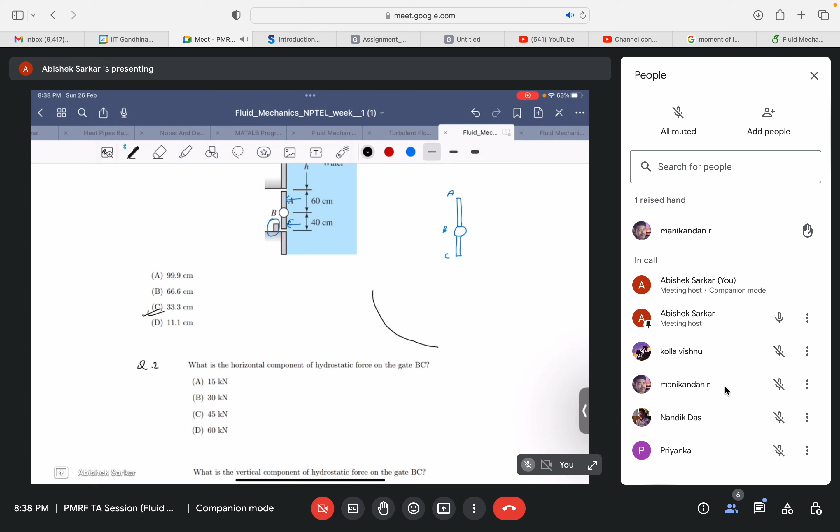So let me draw it in black. This is a curved surface, and this is the free surface of the liquid again. And this is hinged at this point, and there's a force that acts in this direction. Say this is point B, this is point C, and the depth of the water is 2 meter.

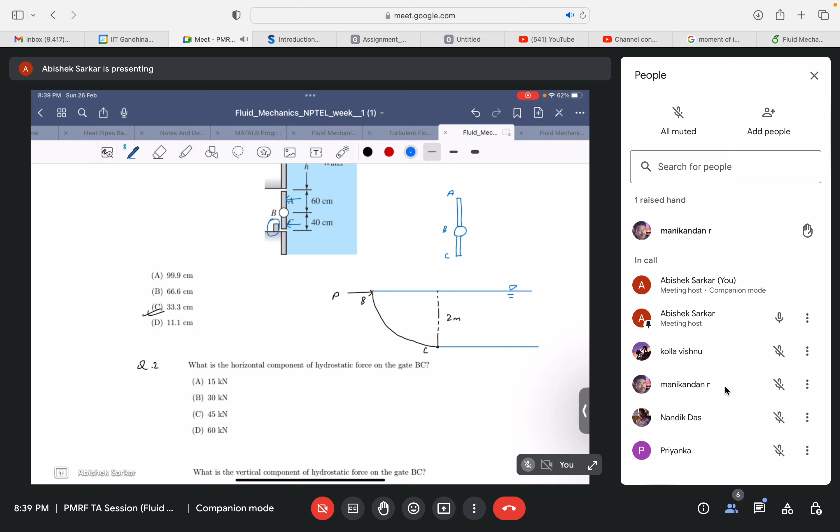I'm extremely sorry I missed the diagram and the question completely and just have the sub questions. So this is water. This curved surface is hinged at C. So given this, what is the horizontal component of the hydrostatic force at gate BC?

I briefly discussed curved surfaces submerged in fluid and how the forces act. The weight of the body determines the vertical forces, and the force acting on the projection of the curved surface determines the horizontal component of the hydrostatic force. So keeping in mind those concepts, anyone please tell me the answer for question number 2, the horizontal component of hydrostatic force acting along gate BC.

So width of the gate? Oh, yeah, sorry, let me check that also. Width of the gate is 3 meter. Yeah, thank you for pointing that out. The width of the gate is 3 meter. And it is a quarter semicircle, okay? Maybe my drawing is very bad, but it's a quarter semicircle.

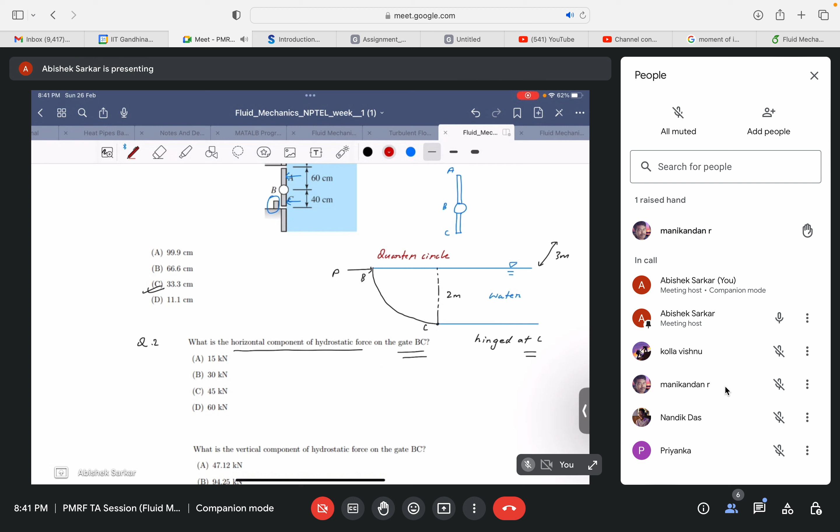Quarter circle, what I'm saying? Quarter circle, sorry. 1/4 of a circle, to be precise. So 1/4 of a circle, width is 3 meter, hinged at point C. What is the horizontal component of the hydrostatic force acting at gate BC?

Sir, option D, 60 kilonewton. Yeah, that can be one of the answers. So I don't know. Others also contribute.

Others, yes, we are very short in time today. We are very short in time, so we need to be quick. So I know these are involving questions, but if you know the concept, it's very simple.

I can't find. No problem, sir. No problem, Manikandan. That's fine. Yeah, Nandik, did you write in chat? Oh, no. Okay.

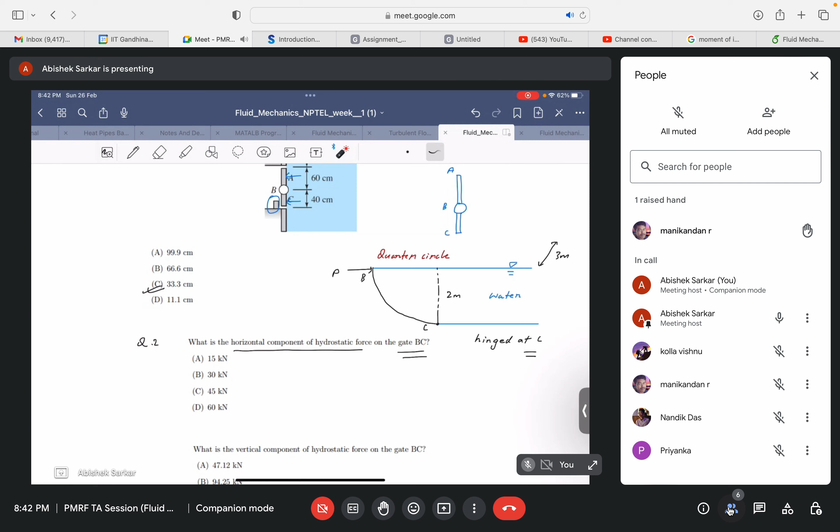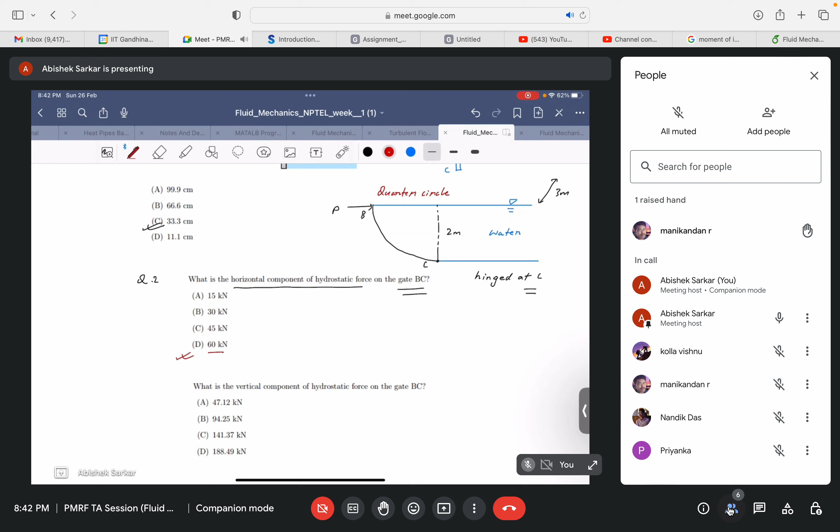Priyanka says it's 60 kilonewton. It's her answer. Right. Any one of you? Okay. So I guess since we are short of time, I'll just go about it. You are right, Priyanka. The horizontal component of force is 60 kilonewton. Could you please tell how did you find it? So projection of BC. Okay, so it would be, say I write rho g.

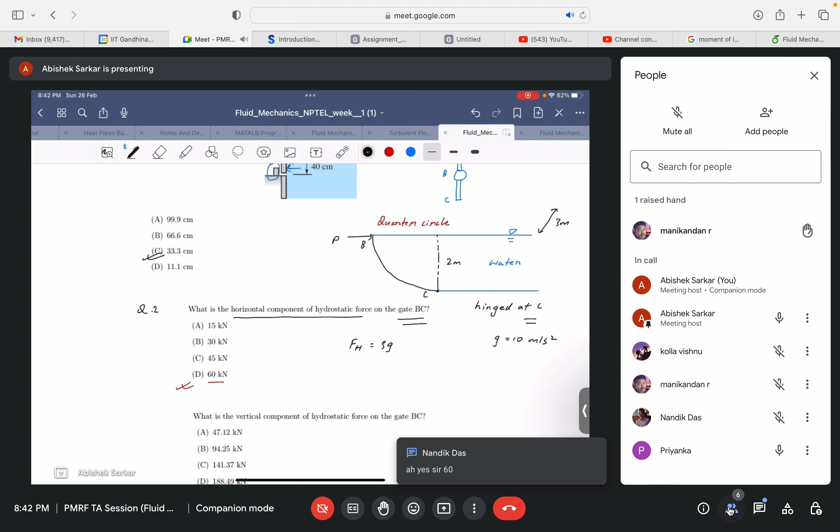Yeah, again one more hint. I take g as 10 meter per second square. If you take 9.81, it will approximately be equal to that. So that's also fine, but for ease of calculation, take it 10. It's very wrong actually. Yeah, thank you, Nandik. I don't know why they asked us to take this. It is what it is. Take 10, it will be exactly 60. For ease of calculation, it will come out exactly 60. So rho, since it's water, density is 1000, g is 10.

Oh, sorry, Manikandan, I didn't get. What did you say? Sir, I can't understand your words because you are going very fluently. Could you please slow down? Oh, sure. Yeah, I'm sorry. Maybe I'm going fast. I'm really sorry. I'll try to speak slowly. Okay. So yeah, thank you, Manikandan, for pointing it out.

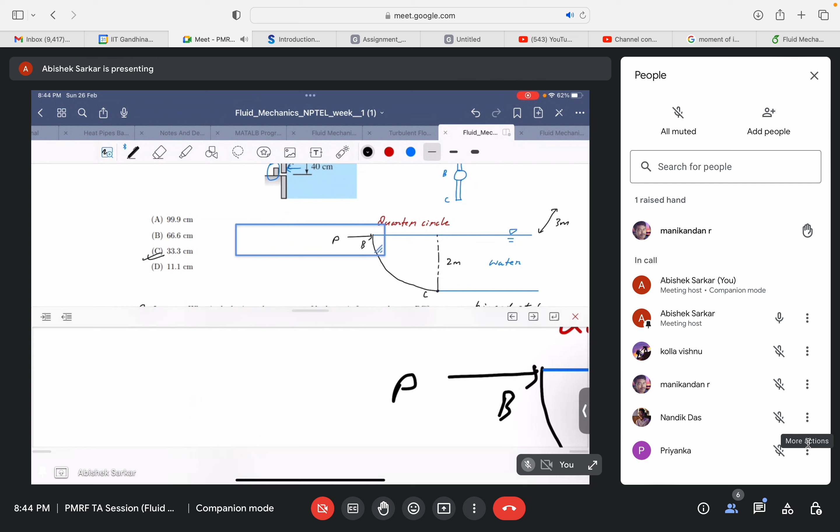So the horizontal component of the hydrostatic force Fh is found by this formula, as discussed by Professor Chakraborty in his lectures and as briefly discussed by me. So here A would be the vertical projection of the curve BC. Since it is mentioned that the depth of this curved gate is 3 meters, the area would be 3 into 2, this height. And hC would be the center of gravity, so hC would turn out to be half of 2, that is 1 meter.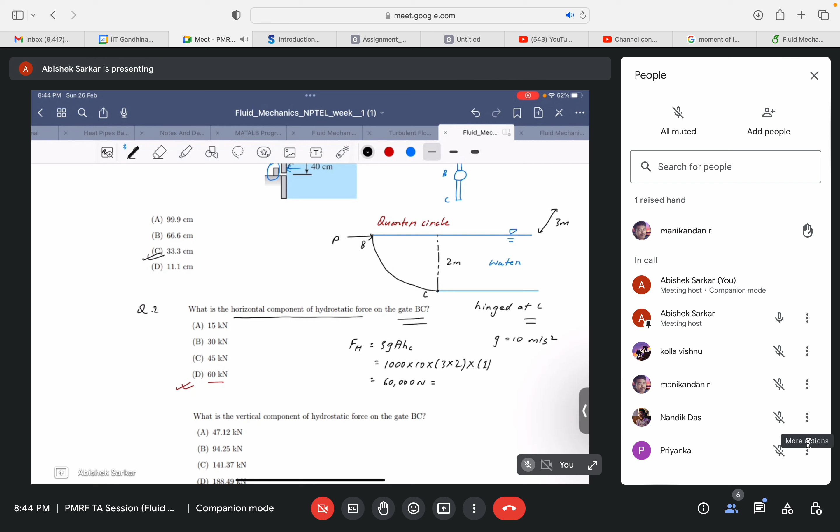So if you just evaluate it, it will turn out to be 60,000 newtons or 60 kilonewton, as rightly pointed out by both Nandik and Priyanka. So it is 60 kilonewton. So I guess it was clearer, Manikandan. Yes, sir. Okay. Thank you.

So now let's go to the third question. Similarly, since you already found out the horizontal component, please tell me what will be the vertical component of this hydrostatic force. So second option, 94.25 kilonewton. This is Priyanka's answer. So all of you guys, do you agree with it? Okay, so yeah, this answer is also correct.

And if you all recall, the vertical component of the hydrostatic force is basically the weight of the fluid confined within the curved surface. So since this is a quarter circle, we can consider it to be the quarter of a cylinder of length L. So FV would be basically given by rho V g, right?

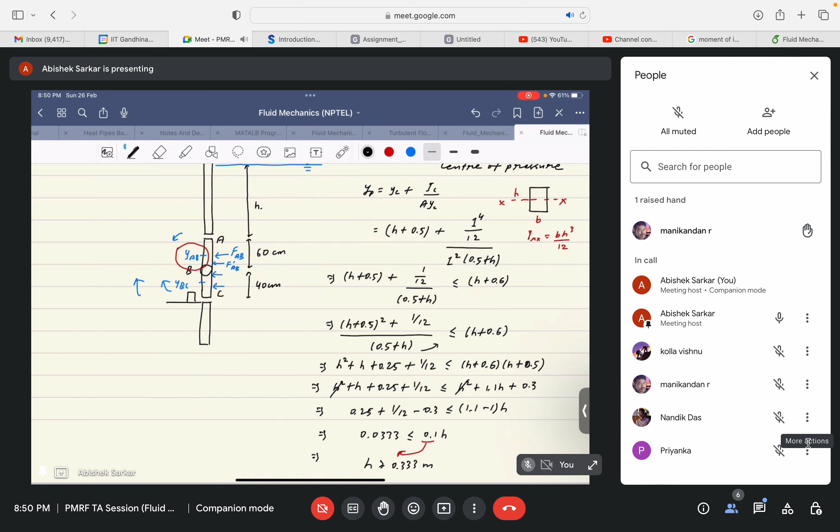So is it 60? Okay, let us look into that. Okay, you tell it is 60. So yeah, this is again a very interesting question, and maybe I also didn't quite rigorously solve it, so it would be very helpful if you could tell us how did you approach the problem. Help us, every one of us, to let us know how did you solve it. Okay, please help me.

So since we already calculated the horizontal and vertical force, okay, let me write it. FH is 60 kilonewton and FV is 94.25. Okay. Yeah, we know that. Then we can get the resultant force, and it should act through the point at the free surface. Or equilibrium. Could you tell me where? Here. No, sir. At the center of the quarter circle. Here. Yes, the resultant force should act there.

Okay. So I guess it should be along this direction. You're saying, right? Yes, sir. Okay. Then how did you find out? Tell me the calculations. Then calculating the moment about point C. Okay. And weight is to be neglected as per the question. Yeah. So FR should then act in the opposite direction if I'm not wrong, right? Then only to resist, or what are you trying to say? Should it be like this or like this? Sir, the top one, sir. That only. Yeah.

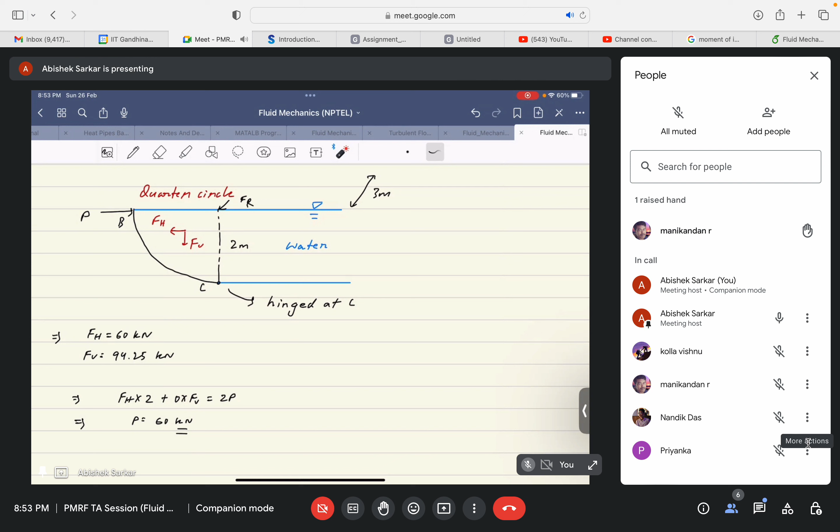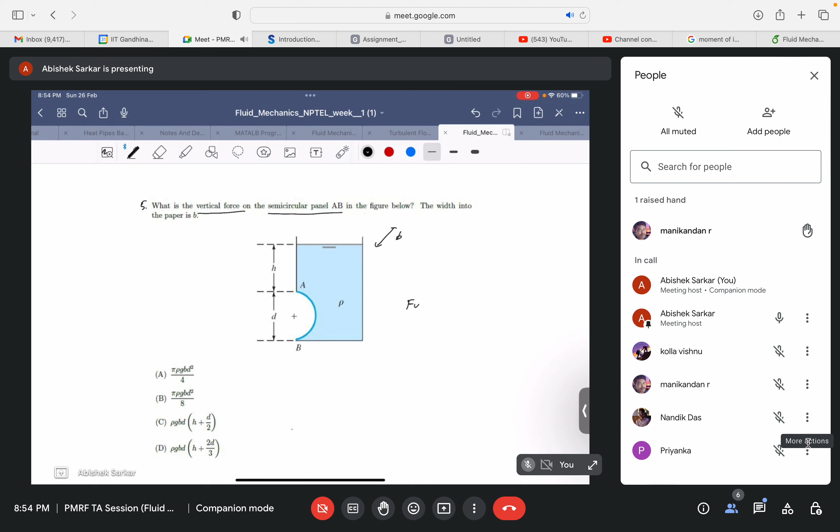Okay. Since we have 7 more minutes, I guess we can take a little bit regarding the next question. And this is again a very conceptual question. And so if you know the concept, it is very easy. I guess this is question number 5. Yeah. So what is the vertical force on the semicircular panel AB in the figure given below? Vertical force on a semicircular panel AB. And the width into the paper is B. Okay. So yeah. We need to find FV. Please check the options and tell me what would be the right answer.

Oh, Manikandan, you have raised your hand. Did you already solve it? Sir, I did not raise my hand. Oh, no, it's actually showing. That's fine, no problem. I will lower it. Yeah, that's fine.

Okay, please go ahead with it. We have some 5 more minutes, so you could solve this quickly. We can look at the next question also. So B. Okay. Priyanka says it's B. So anyone else? Do you have any other answers or same answer? That will also work. Okay. Since we're short of time, I'm rushing it. I'm really sorry for that. Priyanka, could you please tell me how did you find B? Yeah. It is right, so please tell us how did you find it out?

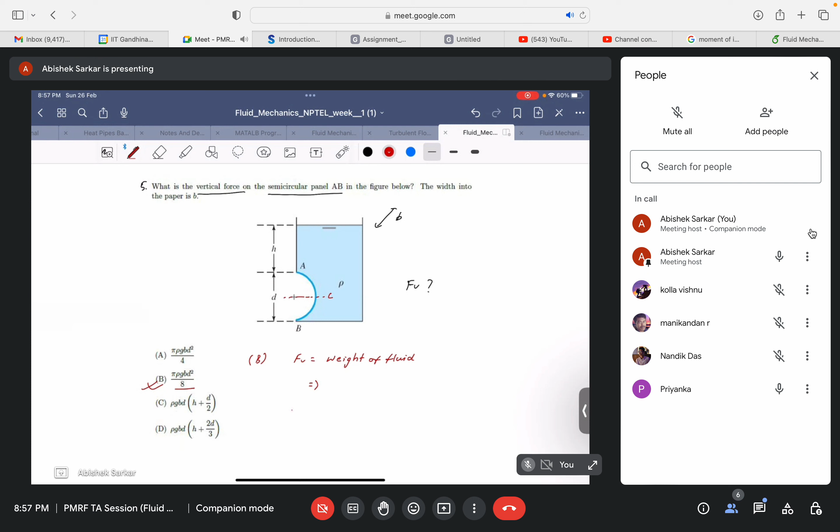Means the vertical force should be the weight of the water acting on the surface. So I divided that AB plate into 2 parts. So on the first part, I put a point between AB on the semicircle as C. So the vertical force acting on AC will be downwards. Then I projected AC up to get the vertical force. What is it? Then the volume of the water, sir, for AC.

This region, right? Or the other one? The top one, sir. This one, right? Yes, sir. How did you find out? Just tell us. For AC, and then similarly for BC also I did the vertical projection. It will get cancelled. Okay, so you found out like this, right? Yes, so finally I will get that.

So whatever the vertical force, it should be the volume occupied by that AB gate, half of that semicircular panel. Yeah, you're absolutely right. Your approach is absolutely correct. But to simplify it for others, if you recall in the class, I guess the professor also mentioned these kinds of surfaces, which do not hold the fluid within them, but external to them. Like this surface not holding fluid within its confinement, but on its exterior surface, other than its interior surface, like the problem that we have previously solved, right?

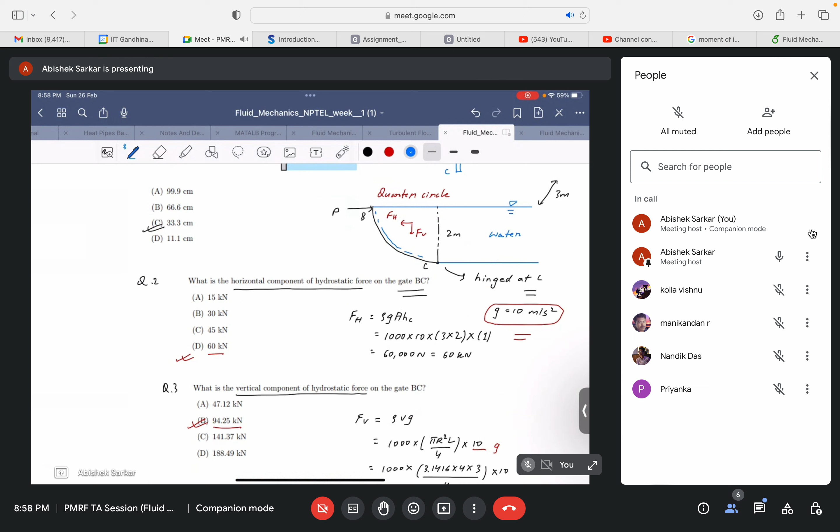There the curve is holding the fluid on its internal surface, right? But in this case it is holding the fluid on its other side, not its internal side. So in these cases we assume that there is a fluid within this curved surface, and find the weight of that imaginary fluid to find the vertical component of the force. This is exactly how sir mentioned in the lectures. What we have done is also correct; from that approach we get the same answer, but to simplify we just assume there is fluid within this region and find its weight.

So, since it's half of a cylinder, it would be half of pi by 4 d square. Again, what was the b? I guess b. This is the volume, and again rho and g are always there, so it will turn out to be pi by 8 d square b rho g, and I guess that is exactly what it is. So that's clear, I guess. Is that clear?

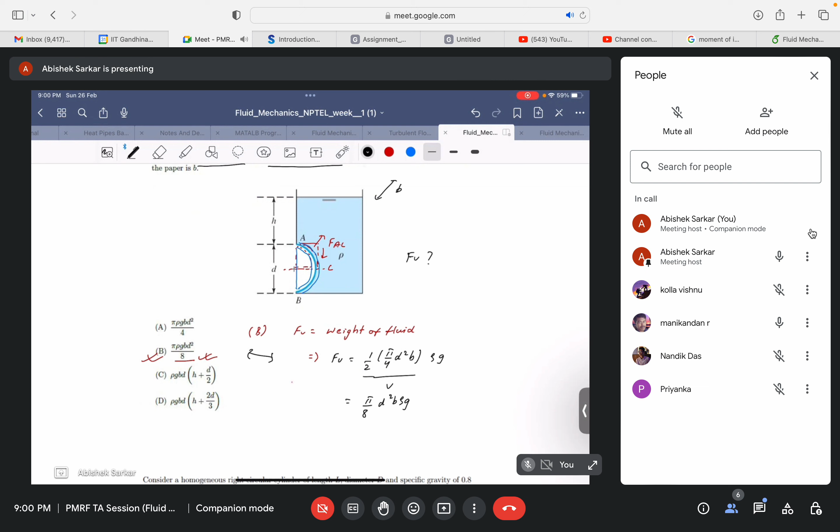Nandik, Priyanka? Yeah, clear, sir. Thank you, Manikandan. Thank you, Nandik and Priyanka. That's clear? Yes, sir. Okay. Yeah, what you have done is also correct, but just in a simpler manner, how sir mentioned, I just portrayed it in my way.